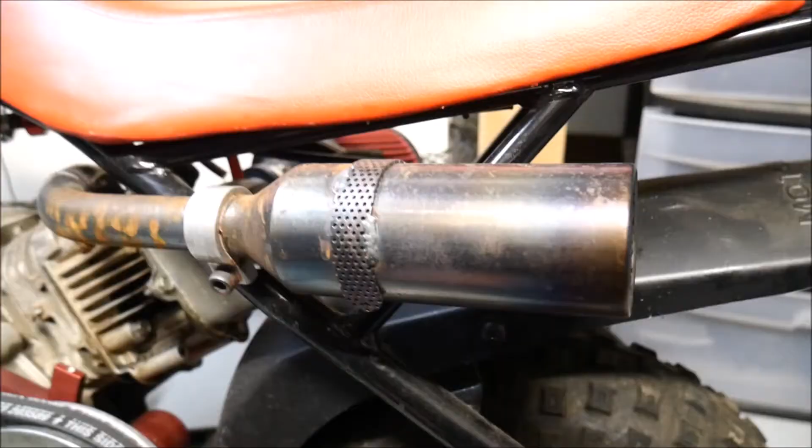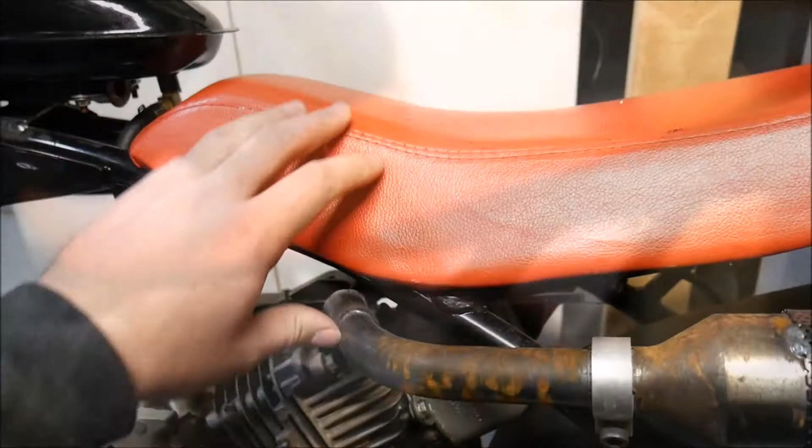Alright, so let's get to why I'm here tonight. Let's look under the frame. So what's going on with that seat? That doesn't look normal. See how that's flopping around? See how when I put pressure on top of the seat, look at that, you can see the foam. So the seat's a little busted. I'm not a huge fan of that.

It's not the end of the world, but it does mean I'm going to make a new one. So what we're going to do is I'm going to take the seat off. I'm going to remove this vinyl and the foam, and get my seat pan, and measure the nominal dimensions of the pan, figure out where the bolts go and all that, and then make a custom one out of aluminum.

So I'm going to trace that pattern, put it into AutoCAD, and then I got a sheet of .063 6061 T6 aluminum. I'm going to be trimming that, cutting that out on the router table anyway, so a couple swipes of the CNC mill will bust out a piece.

It's going to have this bend to it. That's not a problem either. I'll get a couple blocks. I'll throw it on my hydraulic press probably. May not even need to do that. I might just put it in a vise and give it a little whack with a hammer, but I'll put that bend into it.

And then while I'm at it, since I'm kind of close to the frame, I'll put a couple spacers under here. I got a little bit of headroom. I'll raise this seat up and maybe move it forward a little bit. I don't need it to be quite so trailing. I might kind of play with the profile a tiny bit.

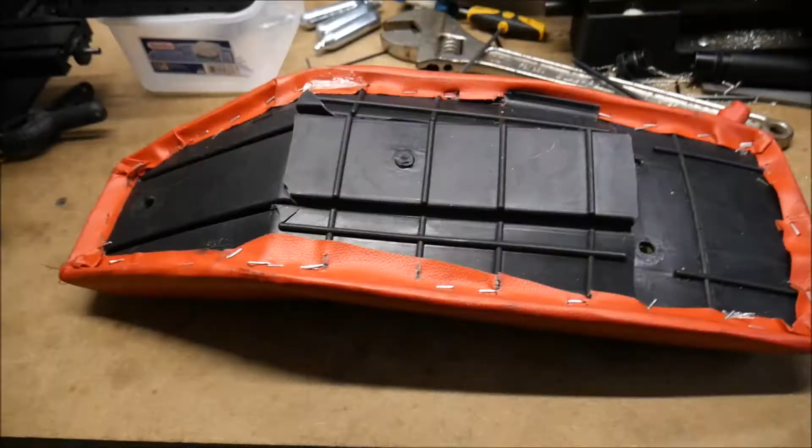Now here's the thing to remember. I'm cutting this as a flat object, even though it's bent and kind of rounded and all that other stuff. So what I gotta do is measure as it lies along the surface to the holes, not from there to there in real space, but as a flat space. What's the travel distance to those holes? Because it's going to be made flat, and then I gotta put it in a brake and bend it.

So the other thing is, this is stapled on. Get the fuck out of here. This thing is stapled on. I won't be able to do that with aluminum unless you're the most awesome fucking staple gun in the universe. So I'm going to actually use pull rivets. I got tons and tons of pop rivets for our airplane, so I'll drill holes and use rivets instead.

So that works pretty good, and unless I come up with a better solution, like I don't know, Elmer's glue, I'm going to just use rivets. So that's how we do it on the airplanes for fabric covering, they'll stitch it on, but rivets.

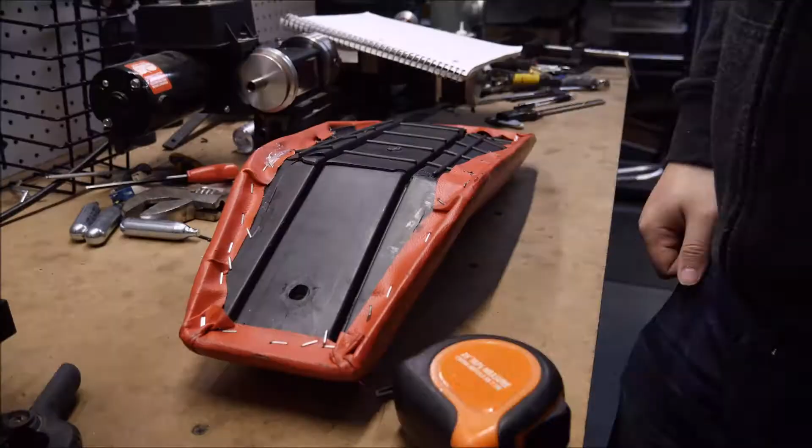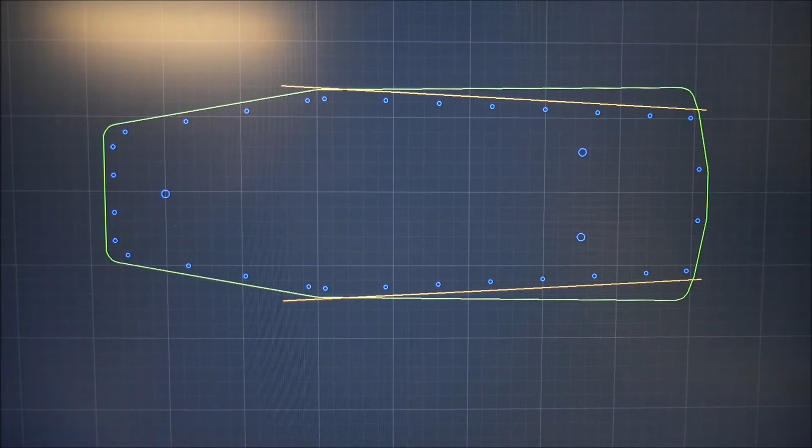And this is my workstation, watching the Savage. He just put out his new video.

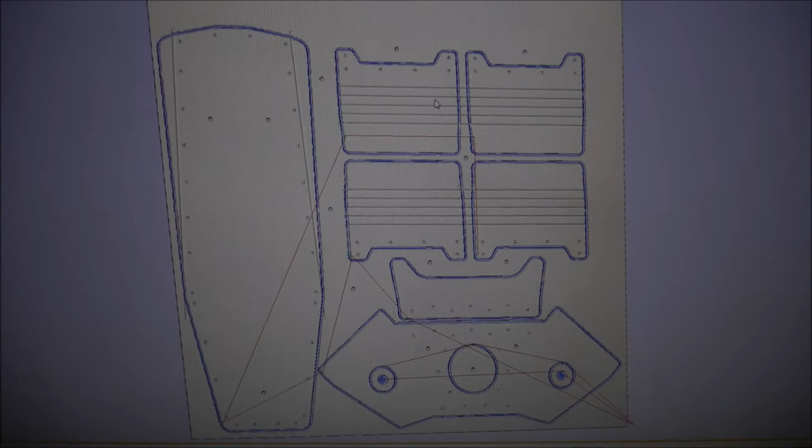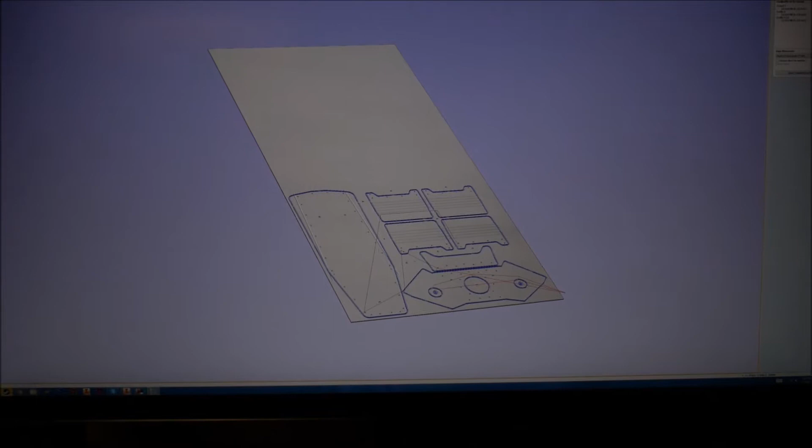So this morning I've got my Cut 2D ready to go. These are the pieces I'm going to be cutting out of the aluminum, and these are the cut paths for that. This program here is called Cut 2D, and it allows me to simulate what is going to happen when I cut my material out. So there's a seat pan on that side. I got these, which are going to be some pads for a pedal that I'm designing for the airplane, and that's a bracket. So that's all getting cut out, and we're going to do that next.

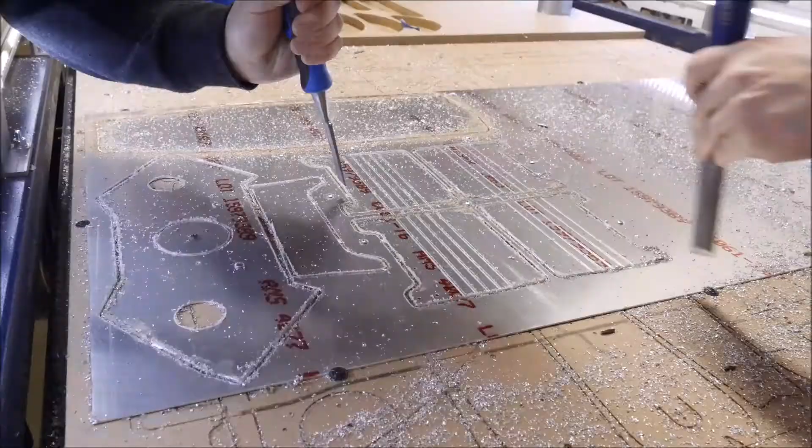Alright, so we just carved out all the pieces. You could see that it took like 4 or 7, I think, bits to actually cut everything out. But you can see here the finished piece. I got these pedal pads, and I got this part here. So I didn't go with lightening holes, and the purpose of that was for heat dissipation. The motor's right there. The lightening hole might let in heat, melt the foam, who knows. So keep the full aluminum. It's not going to help, or it's not going to hurt the weight too much.

And then it's got these grooves here. Those are where I'm going to bend over to make little mini flanges. It's going to help stiffen the seat a lot and give it a little bit of a cool contour. So we'll see how that looks. I got to bend it across there too to match the profile. So a couple bends, and then it's ready for foam.

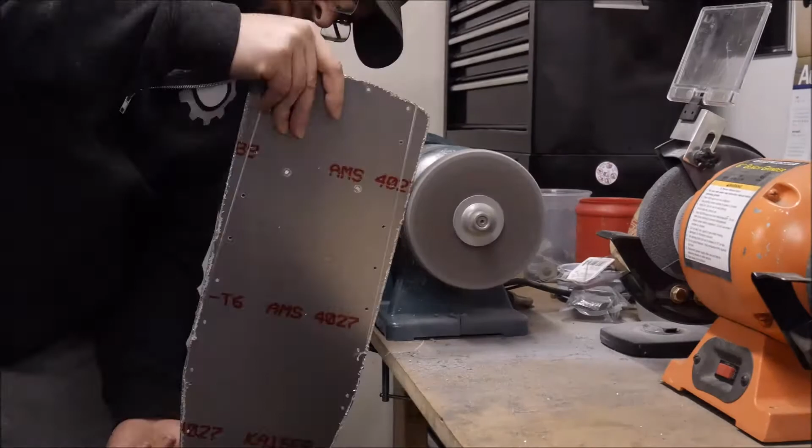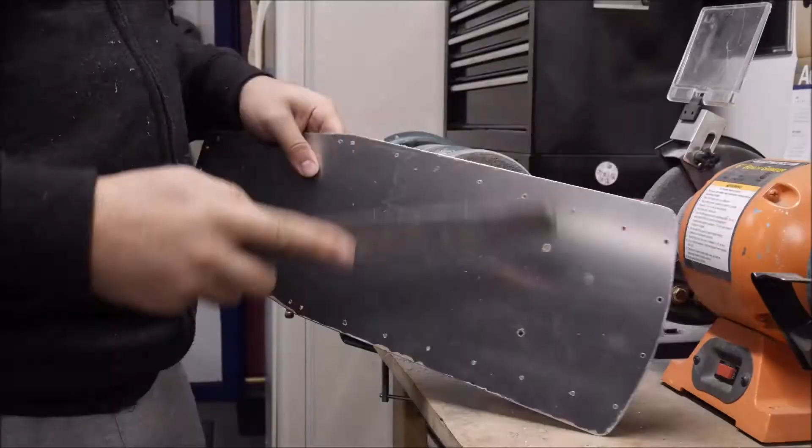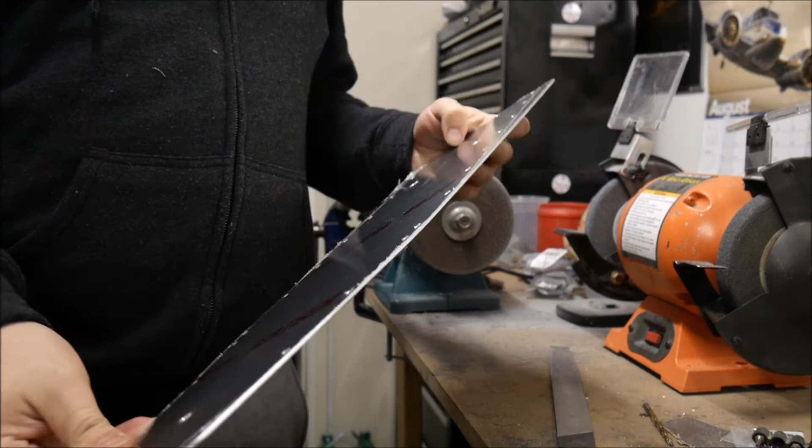Alright, so we got the sheet deburred. All the holes have been cleaned up. All the edges are smooth. You're not going to cut yourself on this. It's not going to cut the upholstery, whatever we put on there. Because that cutter was so rough, there was big old nasty burrs all along the edge. So I had to really work on it to get those knocked off. Usually I use a nicer cutter that's like true carbide, not Chinesium. So it usually leaves a really nice finish on aluminum.

But those cutters were kind of like backup reserve. They didn't do the job very good, so it did do the job though, so I just had a bit more cleanup than normal. But for this part it's fine. If it was on the airplane I'd be maybe more picky, but this'll do.

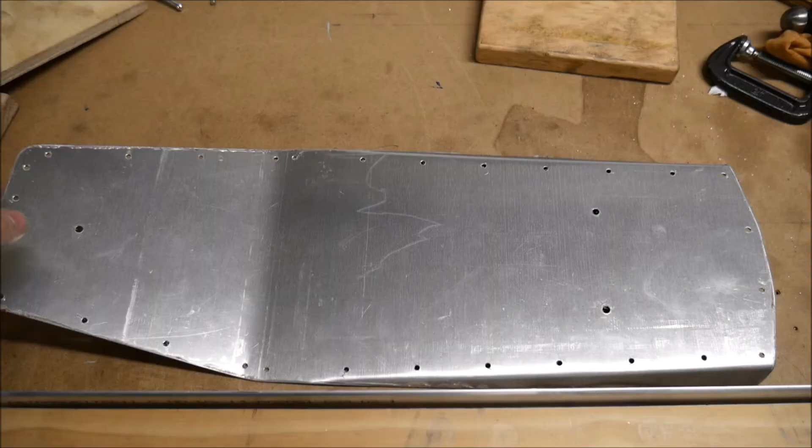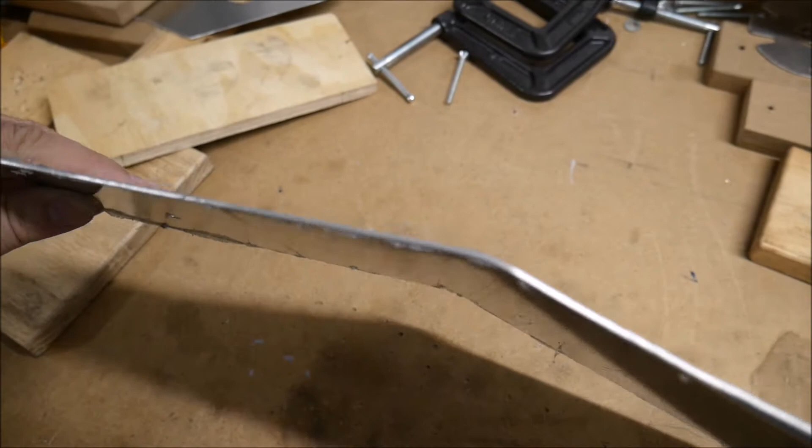So now I gotta bend it, and we'll see how it looks on the frame. Okay, so the part is basically done. It's got the bend here, and those bends there. It doesn't have to be perfect, I wanted it sort of gradual.

And then these are essentially going to rest on the frame, so the whole seat is elevated a little bit. Then I'm going to put standoffs under that, so that should help lift that up. And then this actually is going to have some spring, so between that being mounted there's going to be a little bit of gap. So the whole seat will kind of have a little bit of almost suspension, I hope. We'll see how that works. Yeah, not bad for a hammer.

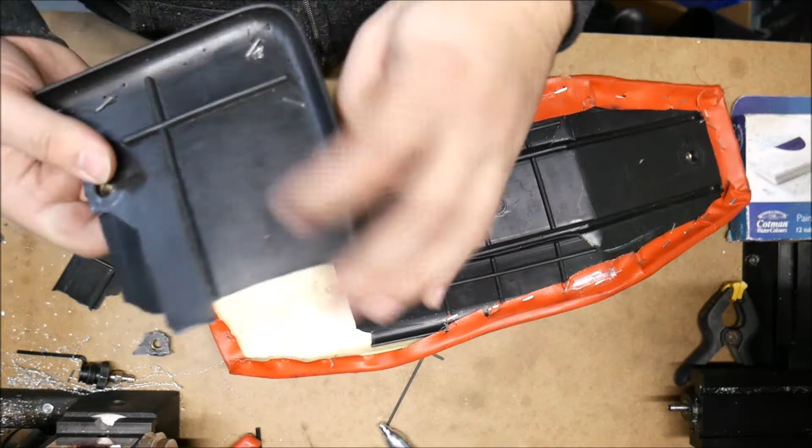Okay, so I'm starting to take the vinyl off, and you can just see how junk the plastic of the seat is. I mean, that's fairly clean, but I just twist it and it shatters. I'm assuming this is some kind of a cast. I don't know, it's like the crappiest. Maybe it's a resin, which would explain these big pore holes. And this vinyl is crap too.

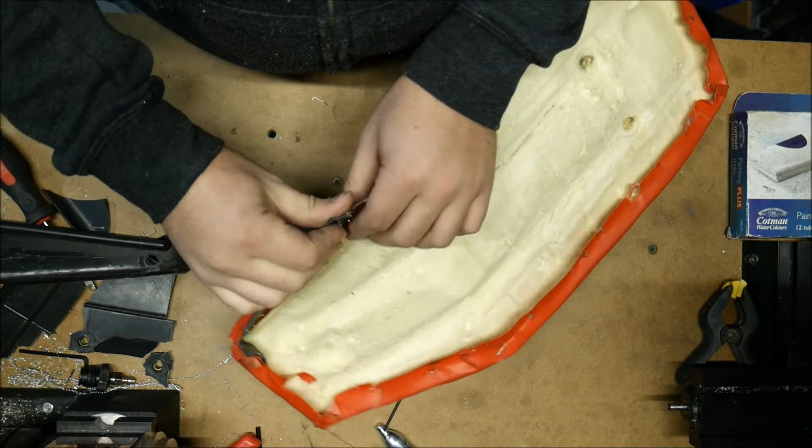But this stuff's probably been sitting out in the cold. I was like, oh, I'm going to try to use a screwdriver and pull all this stuff off, but it just freaking tears. So I'm trying to preserve the vinyl, not so much to reuse it at this point because it's trash, but just for the pattern. It's gross, you can tear on it.

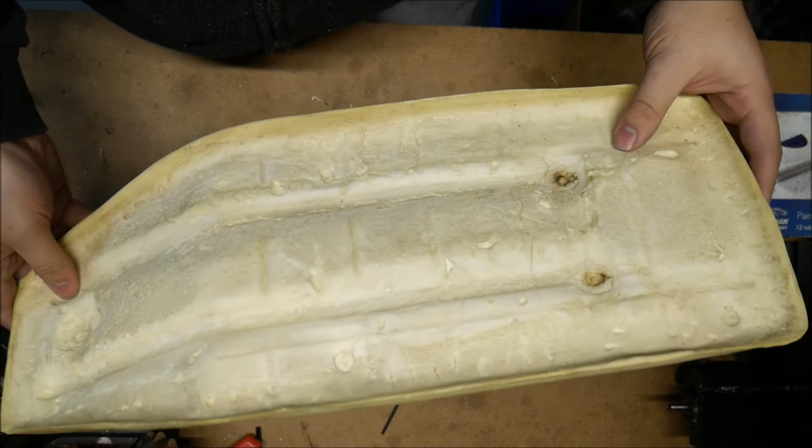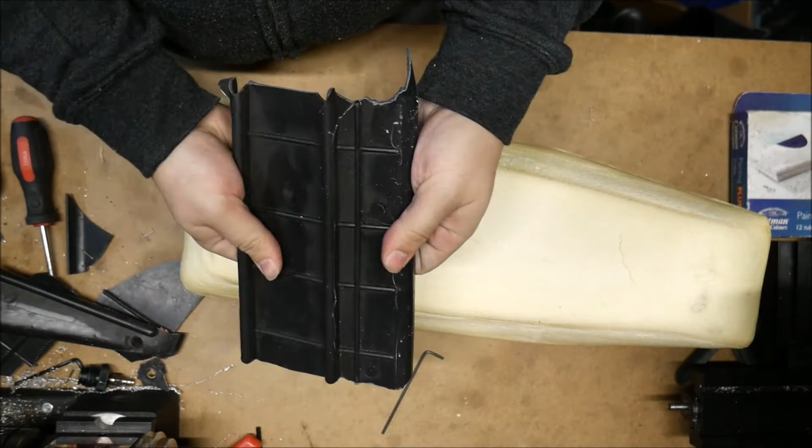So this is the underlying foam, and this looks like it's like Expand-A-Foam, right? So they probably have a mold. They may even have this as part of the mold, and they just spray or pour the Expand-A-Foam, urethane foam, into the mold, and it expands to make this shape. And I'm actually in the middle of investing in a whole bunch of equipment to do that myself, to do urethane casting. I'm hoping I'll be able to choose something that isn't this frickin' garbage. Because, I mean, look at that, that's trash.

So we got the aluminum, this guy is going to be way better. This is about what it looks like. It's gonna be a lot better, and you can see that this kind of overlaps, which is kind of cool. So I'm gonna get some kind of a material, maybe leather or just, you know, heavier pleather, vinyl, something, and I'll coat this and then rivet it into place with pop rivets and maybe some like another layer of material just to reinforce that edge.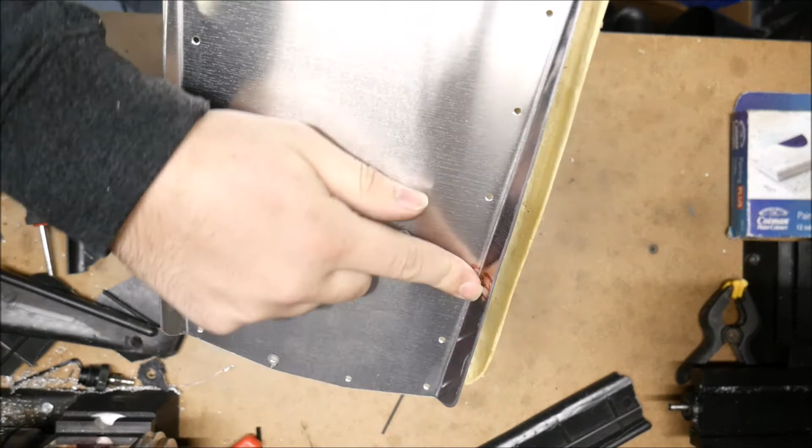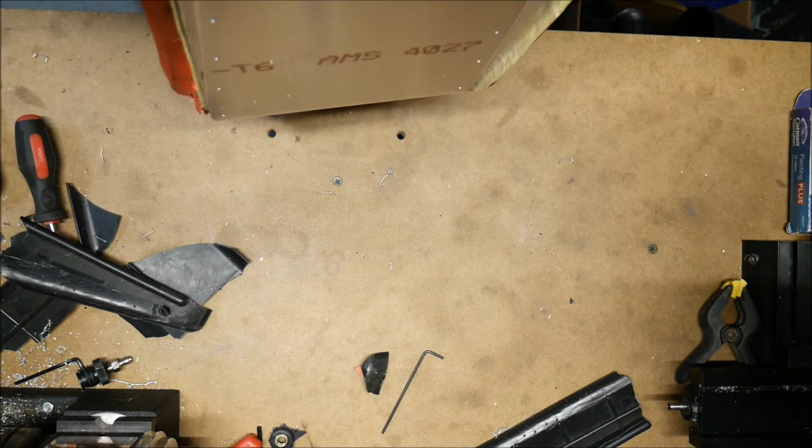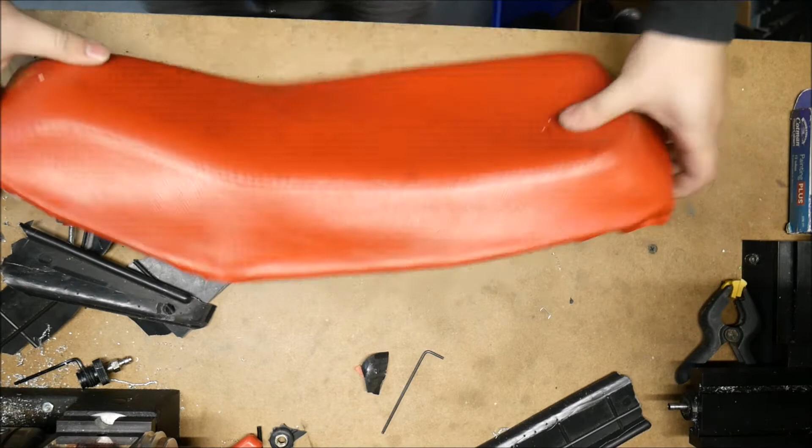But one thing I thought I might do is just mock up how the foam would look with the fabric, just to see if I'm close in my material use. So I'll put this back on. Now I might need to bend that a little bit more just because of the foam. The other option I have is there's a gap there, right? I could fill that with more foam. And in fact, what I could also do is I could get some really soft foam for the top and lay that in between, sandwich it in there and glue it, and then fabric on top. Make a really nice seat that way. But yeah, so it looks like it will work if I use this pattern.

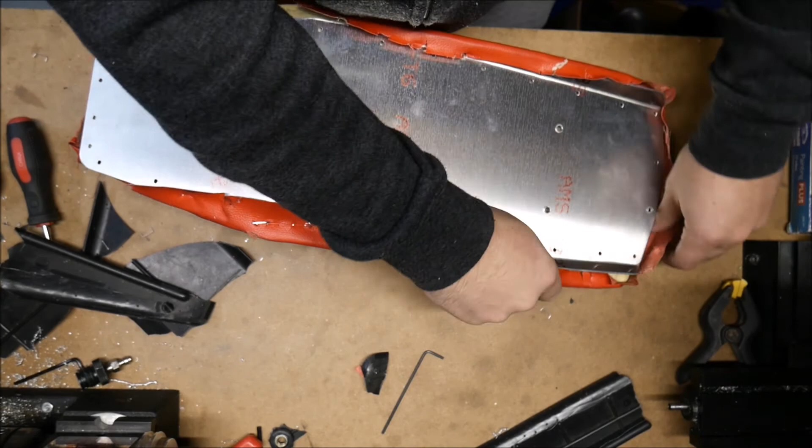There's plenty of material, and then from the outside you almost won't be able to tell. It'll be, when you look on the bottom, you go, oh shit, that's metal. So this will probably get painted too. Yeah, so it's getting there, it needs a little bit of work, but that's what it is.